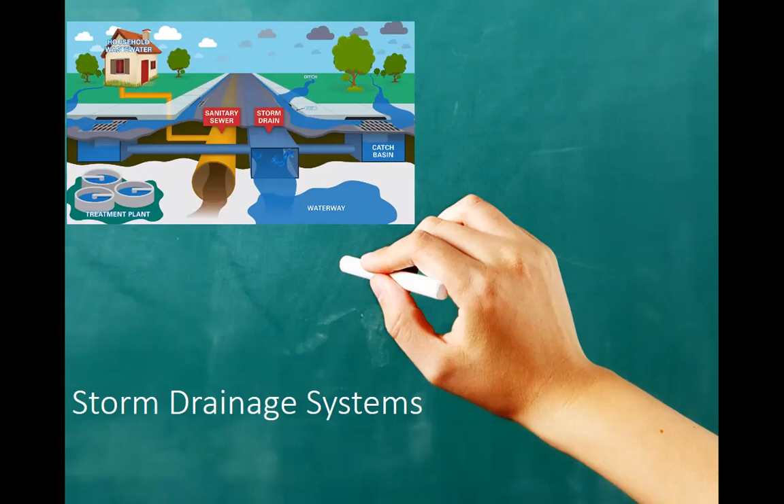Storm drainage system. Stormwater is considered to be rainwater, surface runoff, groundwater, subsurface water, or similar clear liquid waste, exclusive of sewage and industrial waste.

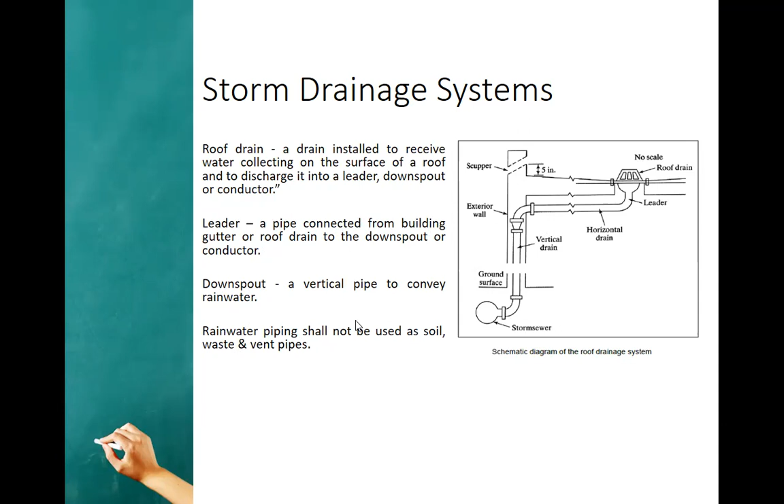Sizing of rainwater piping from the Revised National Plumbing Code of the Philippines.

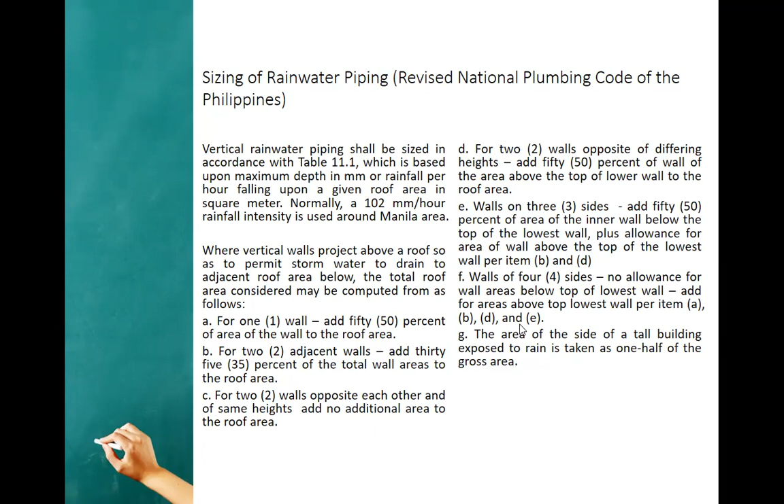So for the following examples, let's discuss. The flat area of the roof will be given as 500 square feet - this example is in English so I didn't convert it. The typical wall area represented by each wall segment will be given a height of 10 feet with a width of 20 feet, which is 200 square feet.

Letter A, for one wall, add 50% of the area of the wall to the roof area. Example 1: a single wall projecting above the roof would add 50% of the total area of the wall, or 100 square feet, to the flat area of the roof. So the total projected area would be 600 square feet - 500 plus 1/2 of 200 is 100, giving 600 square feet.

This amount would then be used to determine the size of the horizontal drain, gutter, or conductor. This is what you'll use in the table - it's called the total projected roof area, or catchment area.

For two adjacent walls, add 35% of the wall areas to the roof area. Example 2: using the same square footage as above, there are two walls of equal height with a sum of 400 square feet. Because the walls are adjacent next to each other rather than opposite each other, only 35% of 400, which is 140 square feet, will be used. The total projected roof area is 500 plus 140, which equals 640 square feet.

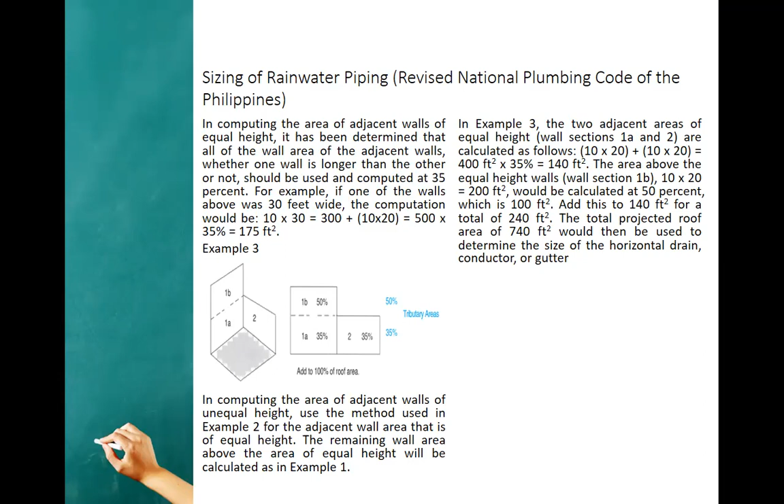This is C. For two walls opposite each other and of the same height, add no additional area to the roof area setup, since they are equal height, equal area, so zero tributary areas. Add 100% of the roof area.

So you don't add anything. In example 4, two opposite walls of the same height will cancel each other. One wall will catch rain, adding to the rainwater on the roof, while the other wall will block the same amount of rain from falling on the roof.

Therefore, no area is added to the 500 square feet of the flat roof area. Now, for two walls opposite of differing height, add 50% of the area of wall above the top of the lower wall to the roof area.

As in example 4, so also in example 5, our figure here: the heights are different. So on top it's 50%, and this one is 0. The two opposite walls of the same height will cancel each other.

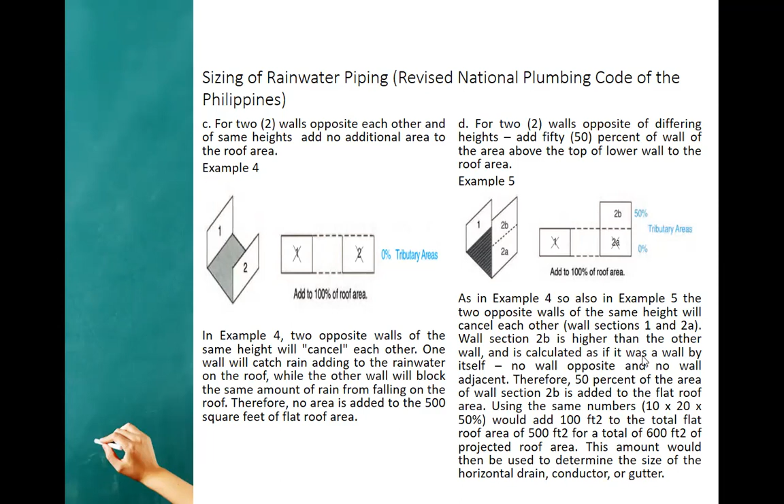Wall sections 1 and 2A. Wall section 2B is higher than the other wall and is calculated as if it was a wall by itself, with no wall opposite and no wall adjacent. Therefore, 50% of the area of wall section 2B is added to the flat roof area.

Using the same numbers, 10 times 20 times 50% would add 100 square feet to the total flat roof area of 500 square feet, for a total of 600 square feet of projected roof area. This amount would then be used to determine the size of horizontal drain, conductor, and gutter.

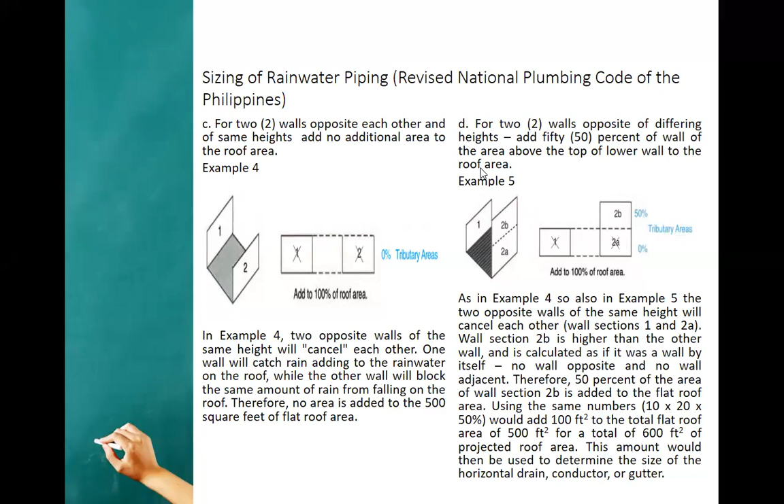Letter E: walls on three sides, add 50% of the area of the inner wall below the top of the lowest wall, plus allowance for area of wall above the top of the lowest wall per item B and D.

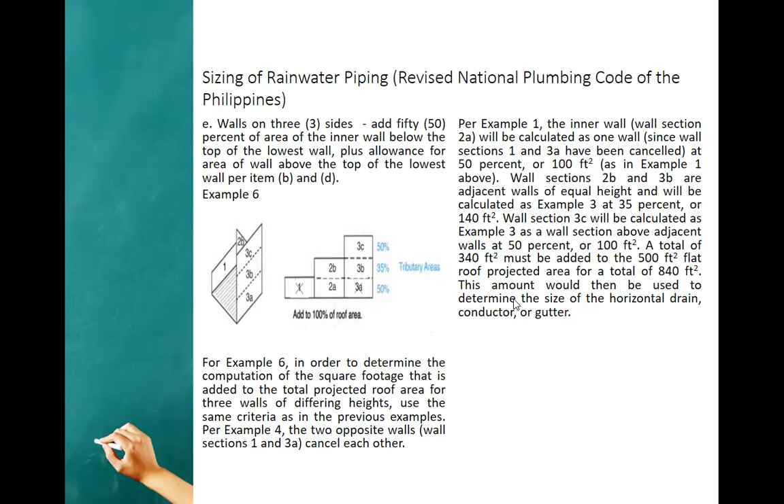3, A, B, C. 4, A, B, C, D. Yan. So, wala ng 5 sides up, pentagon na yun.

No allowance for wall areas below top of lowest wall add for areas above top of lowest wall per item A, B, D, A, B, D, and E.

Example 7. In order to determine the computation of the square footage to be added to the total projected roof area for all walls of different height, use the same criteria as in the previous example. Wall sections 1, 2A, 2, 3A, and 4A are of the same height and opposite each other, and therefore will cancel each other, as in example 4.

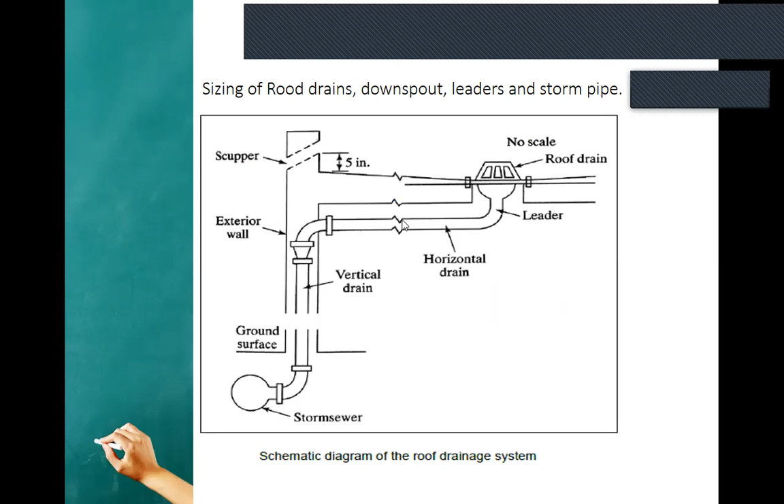Then, sizing for horizontal rainwater piping. The size of a building rainwater piping, or any of its horizontal branches, shall be sized in accordance with table 11-2.

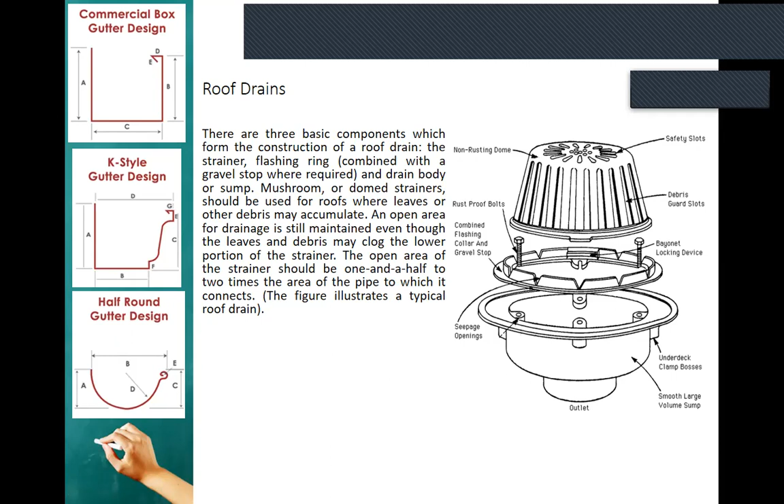Material: inside leaders may be cast iron, galvanized steel, galvanized ferrous alloys, brass, copper, or plastic. Actually, any dependable piping material would be satisfactory so long as it complies with the requirements of the local code.

Underground storm drainage piping may be cast iron soil pipe with ferrous alloy pipe, clay, concrete, bituminous fiber, or asbestos cement, depending upon the requirements of the local code. Roof drains may be cast iron, copper, lead, or other acceptable corrosion-resistant material.

For velocity, while a minimum velocity of 2 feet per second is adequate for scouring action in sanitary piping, it has been found that greater velocity is required for storm water piping. A minimum velocity of 3 feet per second is required to keep the grit, sand, and debris found in the storm water in suspension.

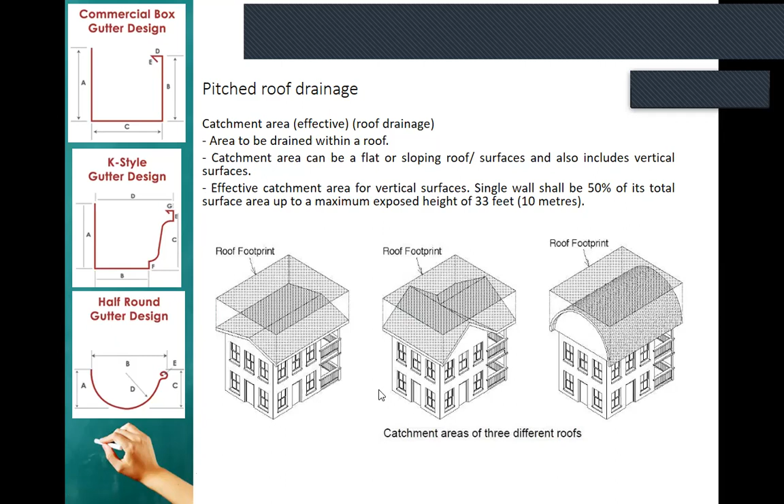This shows different kinds of roofs. Catchment area of the different roofs. So, effective catchment area. This includes that as well.

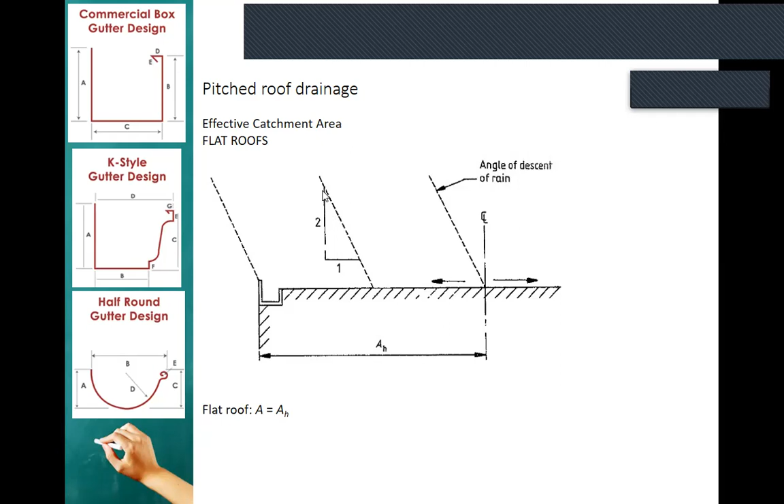For flat roofs, the area A is equal to Ah, where Ah is the area of the roof. This is the angle of descent of the rain, with a design value of 26 degrees. For sloping roofs, the effective catchment area A is roof draining to an eaves or parapet gutter.

So, sloping roof A is equal to Ah plus Av over 2. So it's the area here plus the area of the vertical part, divided by 2. 50%, right?

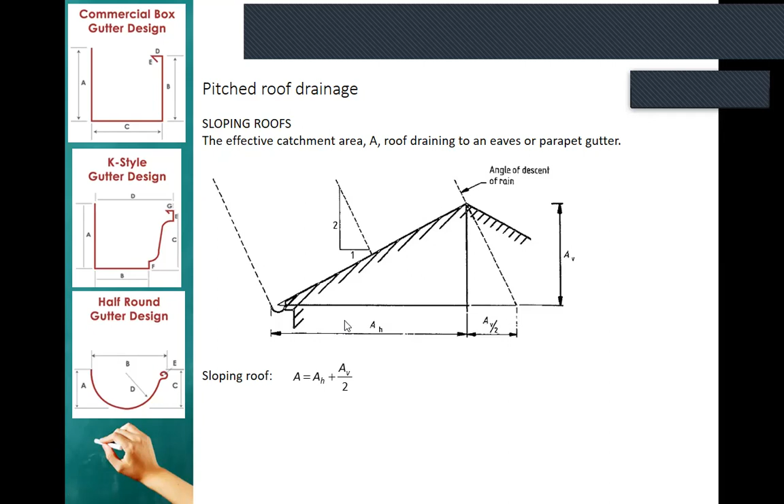So, valley gutter, that's two roofs side by side sharing one gutter. For valley gutter, one side of the roof will tend to be exposed to the wind and the other will tend to be sheltered. The method of calculating the effective catchment is illustrated in the figure below. So, valley gutter A is equal to Ah1 plus Ah2 plus one half of Av2 minus Av1, the difference in their heights. So, runoff from any vertical wall should be added to the effective catchment area. Whatever you computed, add it there.

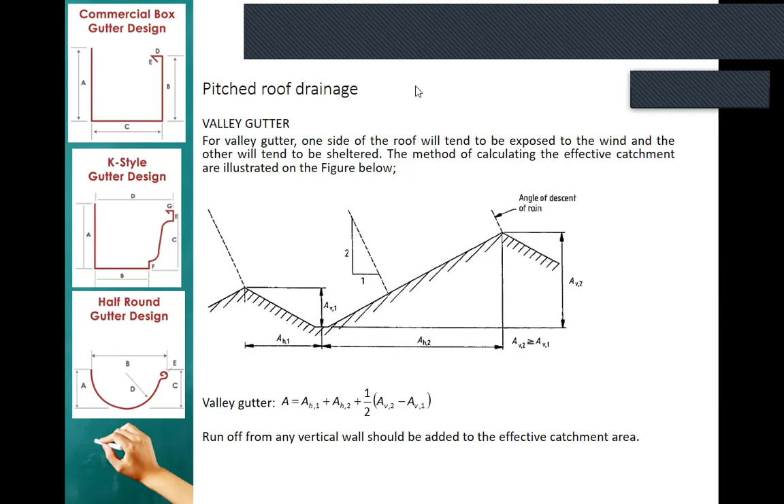There are two types. A type 1 catch basin is a rectangular box with approximate dimensions of 3 feet by 2 feet by 5 feet. Type 1 catch basins are utilized when the connected conveyance pipes are less than 18 inches in diameter and the depth from the grate to the bottom of the pipe is less than 5 feet. That's the slope and the maximum pipe diameter.

Once you go above that, it's type 2 catch basin, also commonly referred to as storm manhole. So once it's 18 inches and above—since they didn't mention equal to 18 inches, it's less than—so 18 inches and above is called manhole, because a person can already enter there.

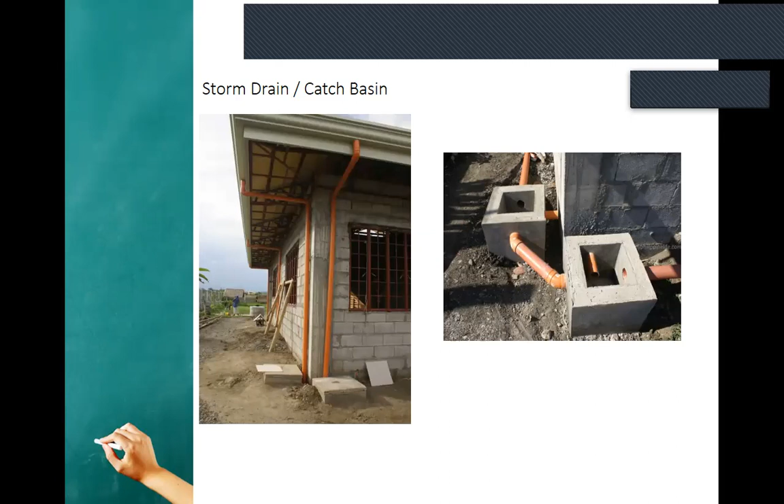The top of the outlet pipe should be 1.5D from the inlet to the catch basin. Oh, it's possible—no, 1.5, this is just 1 diameter. That's also possible. Next. This is called optimal. Okay.

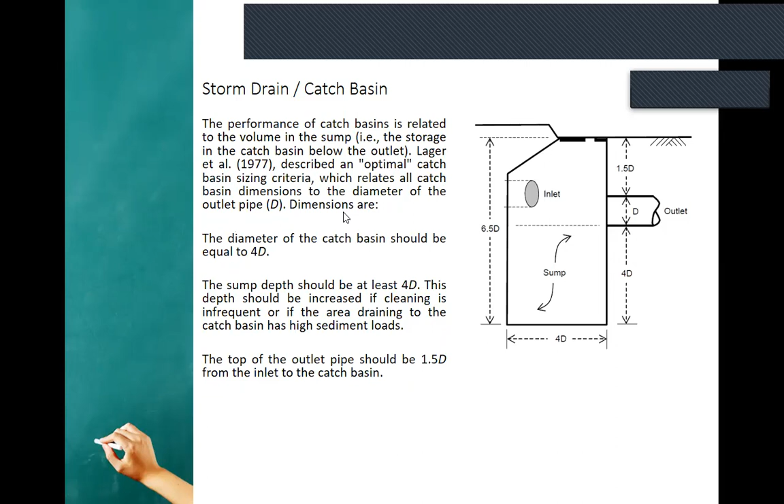A stormwater pipe needs to be strong enough to carry untreated rainwater. Different materials like concrete, brick, or galvanized steel are used to make stormwater pipes. This reinforced concrete pipe is called RCP, which drains excess water from impervious surfaces into nearby waterways. As different materials are used, users can choose based on their needs. Popular materials include reinforced concrete pipe, PVC, HDPP, and HDPE. The material will decide the usability and durability of your pipe.

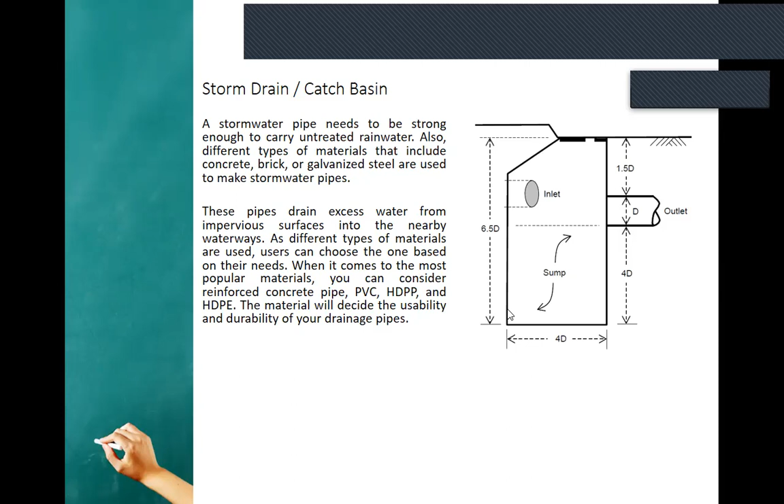Example 11: determine the size of a storm drain necessary to drain a roof graded at 2% slope, with a general dimension of 20 by 30 meters.

Solution: let's use the formula A equals Ah plus Av over 2, because it has a slope. Sometimes this is negligible since it's only 2%, but if it's above 10%, 15%, or 30%, you can't neglect it anymore. So Av equals 0.02 Ah, since it has the same width and same length. Av equals 0.02 Ah for a 2% slope, so A equals Ah plus 0.02 Ah over 2, which equals 1.01 Ah. Ah equals 20 times 30, which is 600 square meters roof area. The equivalent projected roof area is 600 times 1.01, or 606 square meters.

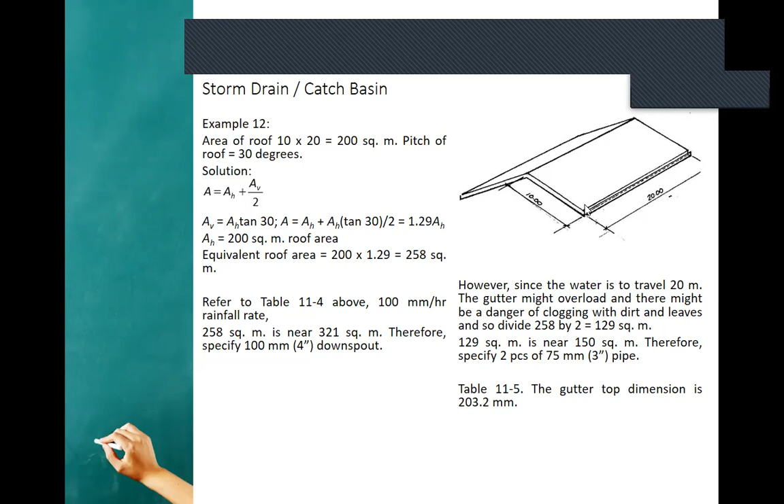Next, table 11-5: the gutter top dimension is 203.2. For the gutter dimension, the top dimension is 260 - we're at 258, so that's okay. This is 203.2, so that's 8 inches.